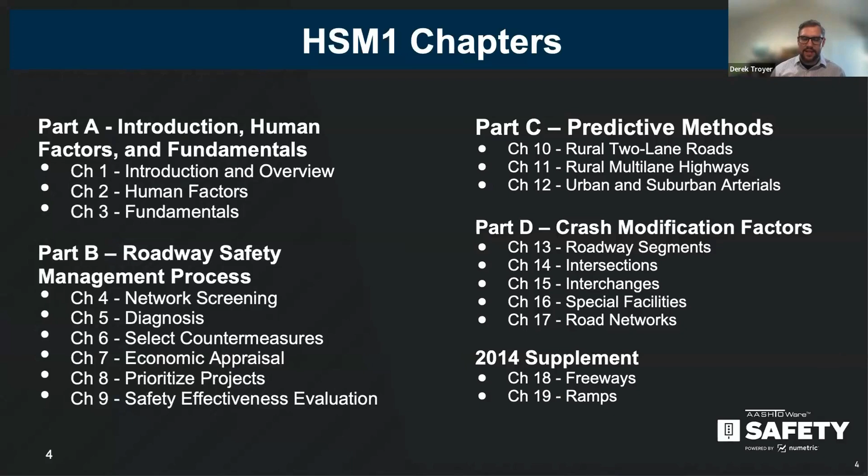So really just a quick look at what the existing chapter structure is. Overall, there's 4 parts, and then under each part, there's different chapters. Part A is human factors and the fundamentals. Part B, the roadway safety management process. Part C is the predictive models. And then D is about crash modification factors. In 2014, there was just a supplement on freeways and ramps, so don't really worry about that.

Getting started with part A, let's go in order. This really sets the stage for how the HSM can be incorporated into the planning, design, operations, and maintenance activities—kind of the holistic view of how safety management works, and gives a lot of background information.

It's probably the least referenced part of the first edition, because you read it once and think, oh yeah, I'll talk about a few things. So it might have more life as we move into the second edition.

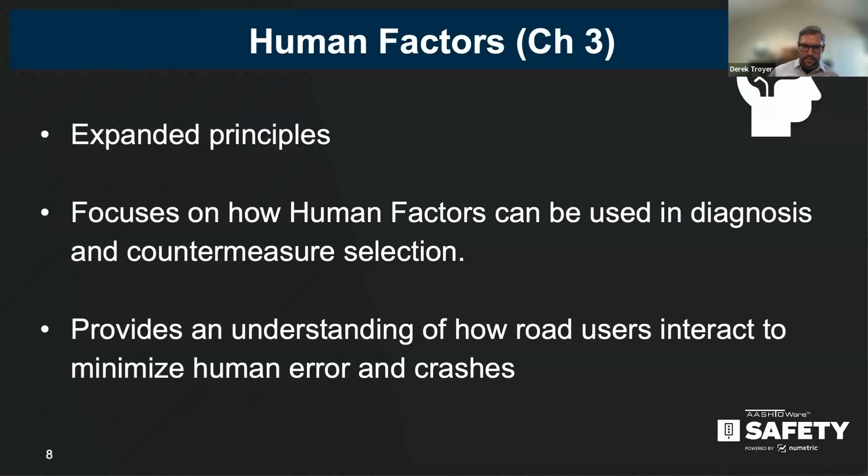Moving on. Change slides. There we go. We'll do this one.

Moving on to chapter 4. I glossed over the first two, but there were no chapters specifically related to pedestrian or bicycles before. This is the first time it's focused on understanding how you can incorporate pedestrian and bicycles into the roadway safety management process, as well as some of the predictive models, which we'll get to in Part C.

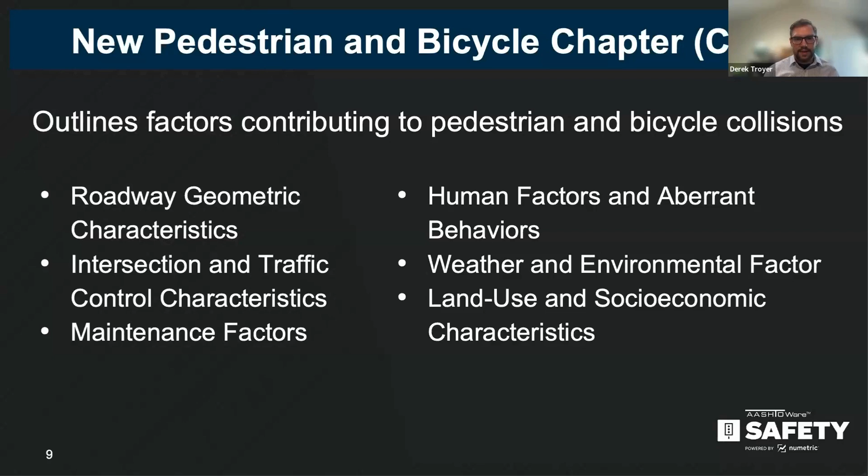Overall, it outlines the contributing factors in these different areas you see on screen. It also added crash typing for non-motorist pedestrians and bicycles, specifically on what they were doing at the time of the crash—we get tons of crash reports, which are kind of our bread and butter for figuring out what's going on.

And that's really lacking—it's just like, 'collision with a motorist,' or 'collision with a non-motorist,' like thanks for helping. So this really helps identify, if you read through the report, how to categorize the movements, and those crash types can then lead to countermeasure selection.

So if you have this kind of scenario repeated at a location, you should consider these countermeasures or treatments for inclusion. Some states, like Massachusetts, are moving forward—they have a vulnerable road user box in the crash report, which I checked yesterday, that includes some of this crash type info, like what the non-motorist was doing before the crash, during the crash, and where they ended up. That kind of information is really important.

So we'll see how that spreads. I believe that started from legislation, according to Bonnie or Michelle—somebody can correct me if I'm wrong. But I think that's one good way to see how we're making progress with these crash types overall.

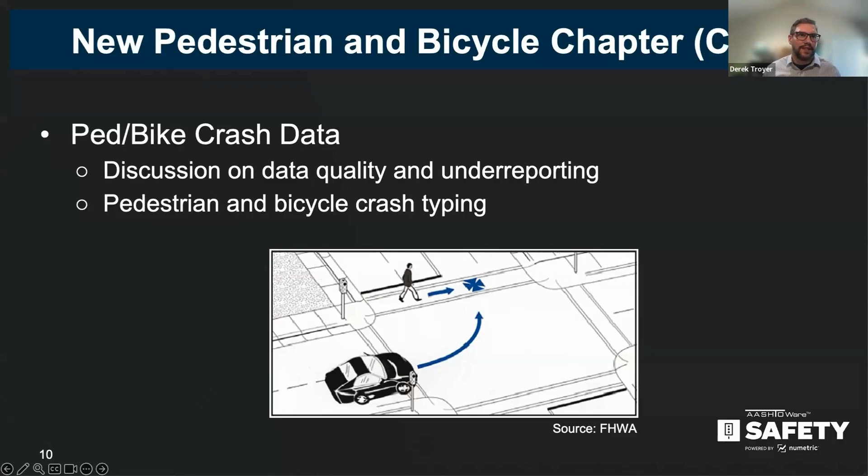So get ready, we're on our first or second poll question. I want to know, if your agency creates pedestrian crash types, how do you categorize them? Let's see here.

So that's the highlights of Part A—again, really trying to incorporate more human factors and pedestrian and bicycle considerations into roadway safety management, giving them the priority they deserve in our industry as we move forward trying to solve serious injury crash problems.

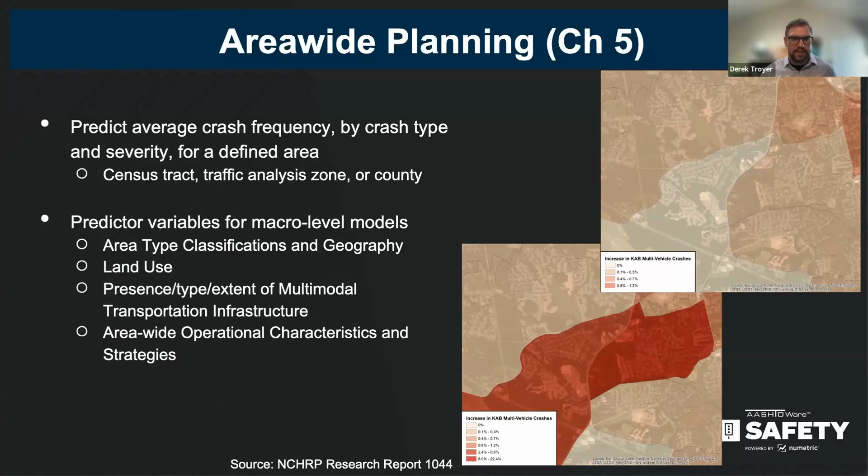I just want to touch on network screening because this is subtle and most people I think will miss it. There were 13 performance measures in the network screening chapter. In the first edition, we removed two. That was kind of consensus of the panel and AASHTO Committee on Safety steering committees. But there was also this intention of grouping these. So the first 5 are really great at reporting, but they're less reliable, so you want to, if possible, try to move towards the more reliable methods for network screening.

And so they highlight them. All the 11 remaining ones are still defined, still included, still have a nice chart in the second edition that tells you what the limitations are, what to consider if you're using that measure in your performance, depending, even if you're still using it for network screening. Like, do something is what my mantra is. I'd rather you do something and work to advance the methods versus not doing anything and waiting until you have everything accurate.

So the other thing in the network screening chapter that I'll note is there are actually safety performance functions added. So there are national network screening models available now. They're pretty easy to develop. So I don't know how beneficial it is, but it does give the chapter some weight with an example problem as well.

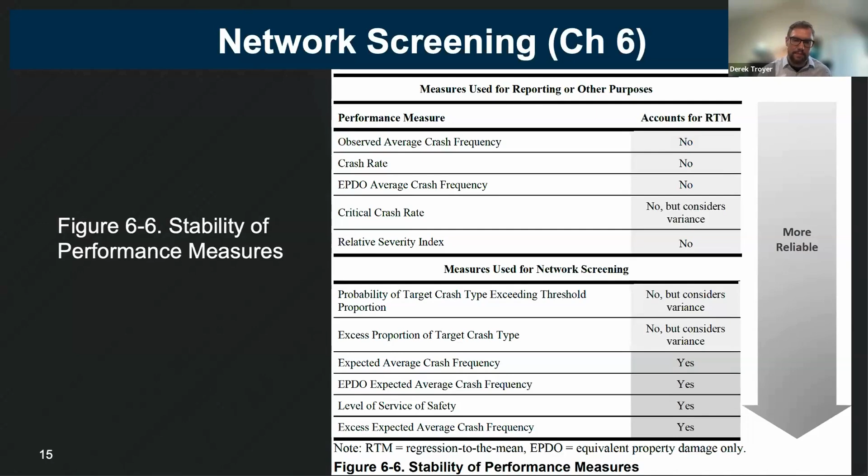Now I'm just going to touch on systemic safety management. I hope everybody knows what this is. It's near and dear to my heart. It's one of the best data analysis tools we have that is proactive when you're looking at crash data. So how this works is you identify a target crash type, usually from some state strategic highway safety plan. I've seen others in the local road safety plan area, comprehensive safety plan area.

These are like priorities for the communities. And then you go in and you find where those crashes are occurring, what the facilities look like, and you pull out contributing factors, things that are in the area. They might not contribute to the crash, but they're all these locations with severe injury crashes have these similar factors, and they might not lead to the crash, but they're there.

And then you screen your network regardless of crashes for those same contributing factors. And if you have 5 factors, you rank the ones that have all 5 to the top of the list, and you just rank down from there. So you can complicate that, you can use predictive models with this, but at its basic level, it's trying to find locations where crashes have already happened and then do countermeasures where you haven't seen a crash yet, so there's no crash history. And that's really the benefit of the systemic analysis, because we know crashes are random in nature, especially our fatal and serious injuries.

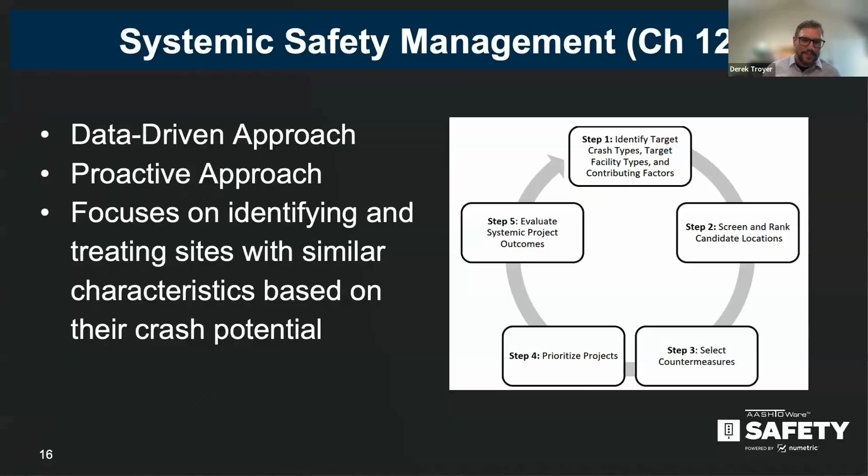So moving on to part C, I'll just go to the next slide. It's complicated.

There's at least 100 new predictive models. I think in one meeting I asked how many more safety performance functions or crash prediction models are we going to stuff into this thing, long term? How sustainable is this? And we think we're reaching critical mass. There's definitely some cleanup activities, which I'll get to in a couple slides.

But overall, the new ones that have the most attention are roundabouts, luckily. It came out of NCHRP 1770. And then one-way streets and 6 or more lanes on your urban and suburban arterials. Same study, I think it's 1762, or 1758 - one of those two includes your one-way streets and 6-lane plus.

But then it also took out all of the pedestrian and bicycle prediction models that were included either proportionally or the best we could incorporate them into the prediction models with motor vehicles, and they're now separate. So they're all pulled out and have their own prediction models and their own likelihood factors, because they're slightly different than a crash modification factor.

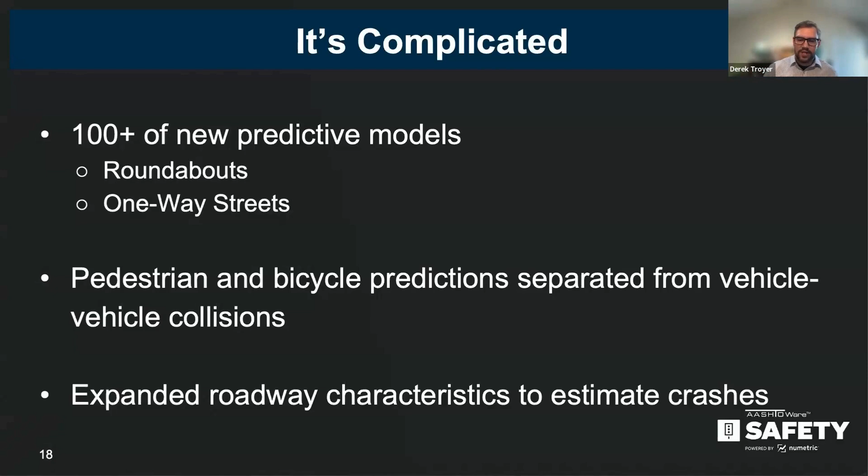And then overall expanded roadway characteristics to help us in our project development process. Safety management is, if I change X, what would my outcome be? So trying to expand what characteristics we know influence crash outcomes and severity. Just to highlight a few, I needed this slide on the last one.

These are kind of the big projects that were used as source material for the second edition of the Highway Safety Manual. So you can see them here. This will be posted so you can get them.

Now, I will caution, do not go to the research and look for the coefficients that are included in the research. They've been modified as some of these are getting old. Most of the data used for all of these studies is about 10 years old or older.

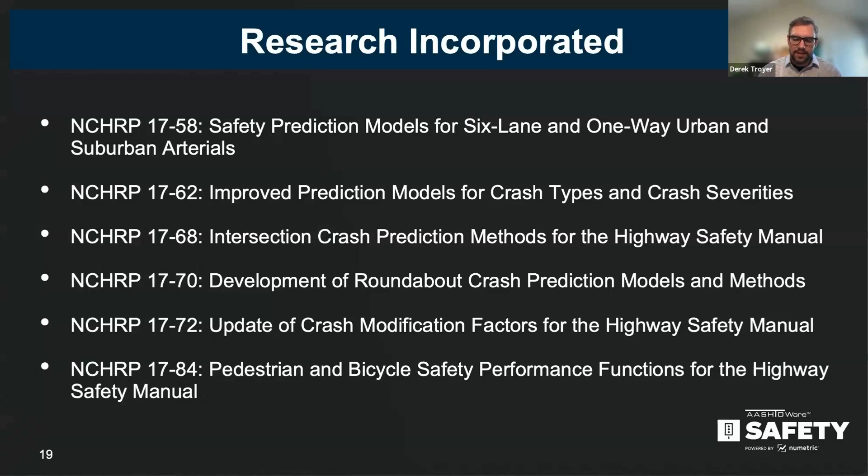So they've been calibrated, and actually 1772 did some of this work to bring them up to speed and make their site types a little bit more comparable. Maybe not the best way, but it is at least so you can compare. If you don't have your own models or calibration factor, you can use these studies.

We did exclude a few of these research studies. There were just more questions that came out of the research than we were prepared to put into the official second edition. Not that this material isn't good or has good ideas and leads to decisions - it's just maybe needs a little bit more vetting.

One thing with the part-time shoulder use or HOV, HOT lanes is we actually prepared the second edition for those. So you'll see that freeway analysis is now done directionally, where in HSM1 it was done bidirectionally. So if you had 4 lanes on one side and 5 lanes on the other, traditionally you'd analyze it both as a 4 or 8 and a 10 lane, and you average them back together to get the estimated performance. Well, now you just do one side and the other with the actual model, and you'll get your estimates. So more to come on those, and we need to dig into them a little bit more.

Overall, this is the general form of the crash prediction model. It hasn't really changed, except that pedestrians and bicycles have been pulled out into their own little prediction model areas, and they get added to the motor vehicle prediction models.

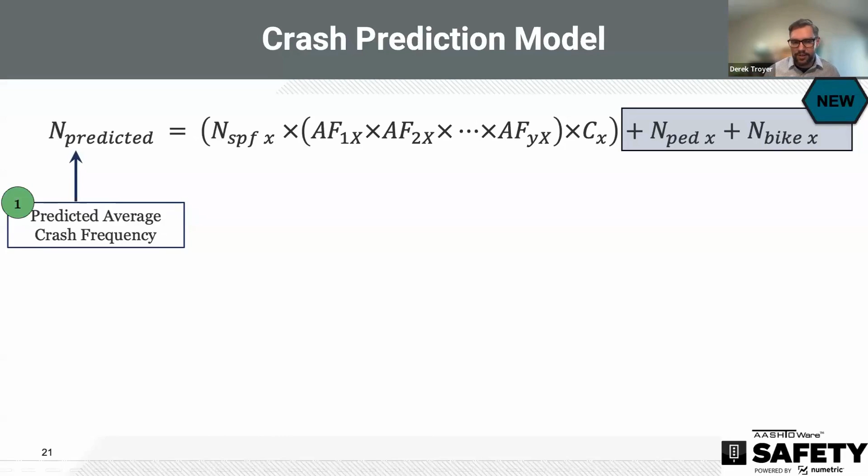I would start to at least move towards some of these easier network screening safety performance functions if possible, which is number 2. That's all you get for network screening is a safety performance function. Typically, some people complicate things, but on the norm, this is just that safety performance function, the graph of the line. It's a pure function, typically of ADT, either total, entering, major and minor road approaches, and I'll show an example in a slide of what this looks like.

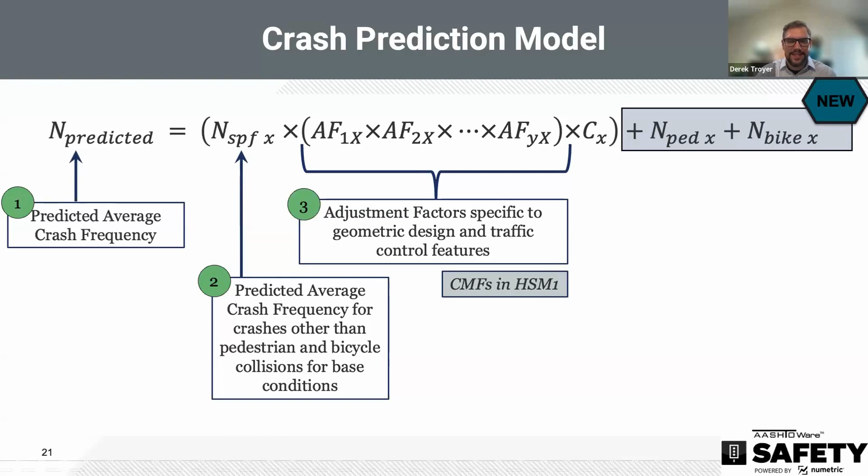Next up comes the adjustment factors, and you're like, well, this looks familiar, but these weren't called that in the first edition, and you are correct. So these are very specific crash modification factors that were developed in association with the safety performance function. Number 2 and number 3 were developed together. The thought process was, we need to call these something slightly different than a crash modification factor because they're special. And it also led to a lot of confusion as we're trying to implement some of these things. So they have been changed to adjustment factors, and they're still crash modification factors, but they're a very specific subset of them. Number 4 is your calibration factor.

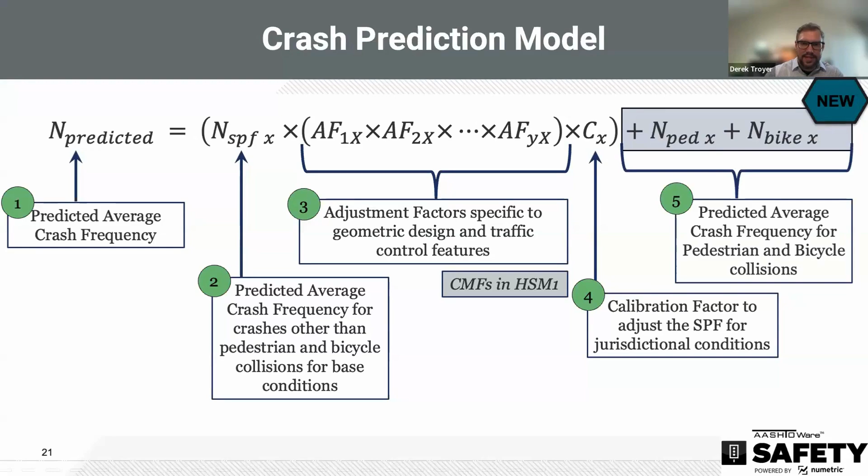And this is a lot of your changes to your local conditions, crash reporting thresholds as well. And then finally, the new pedestrian bicycle crash prediction model. So we'll dive into each one of these with a slide or two just to kind of hit home.

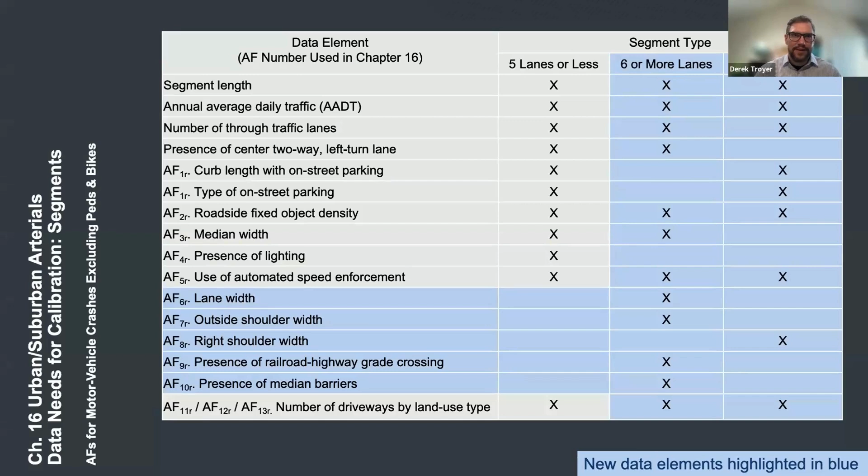This is to scare everyone, which is fine. I panicked when I started to see some of these models. So this is in chapter 16 for urban and suburban arterials. These are the requirements of the crash prediction model for segments. And you can see there's 3 groups now, and in HSM1, we only have 5 lanes or less. Now we're up to this, we have 6 or more and one-way arterials. Each one of those sets of site types or segment types require different elements to be collected and adjust that safety performance.

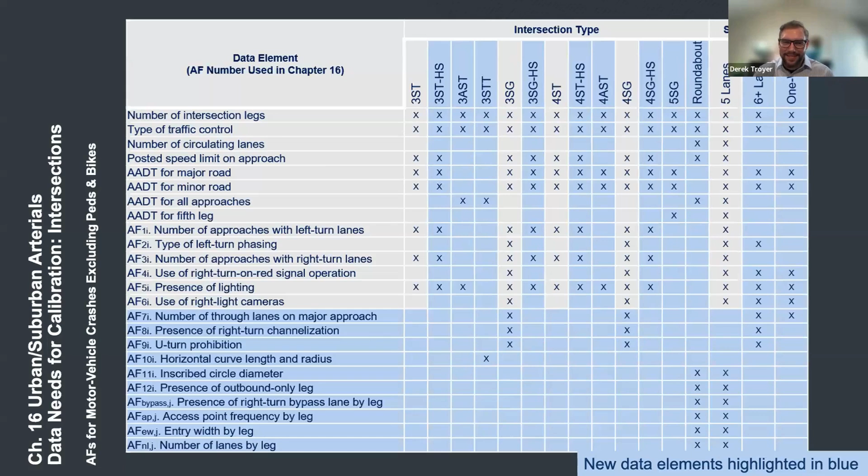And then you get the roundabouts. Finally, yay! Heads up, I believe next week... oh, I could get this wrong. Roundabout week is next week. That was this week. I was a week early, but I didn't forget. At least it's always better to be early than late. So next week is roundabout week.

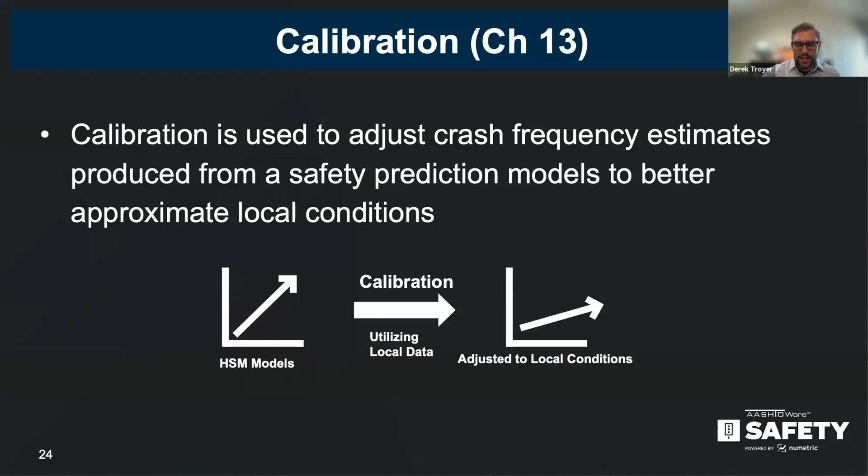All things roundabout. And then finally, the calibration factor, as I mentioned before, really trying to adjust that safety performance function and your adjustment factors up or down based on your local conditions and reporting. Why this is important is everybody has different weather patterns, everybody has different lighting. It stays warmer longer in the south, so there tends to be more pedestrian activity in the south for longer periods of the season. Just different driving populations, age. We know we're an aging population. So trying to account for a lot of these things as we encounter these safety performance functions.

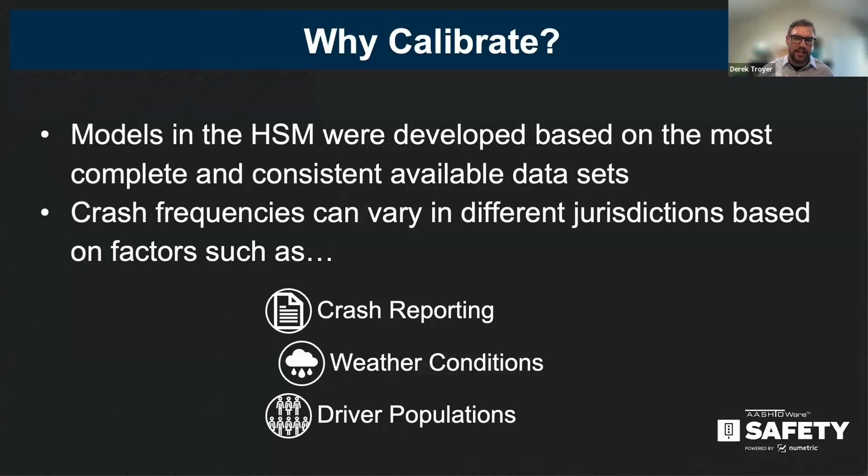Also just updating it, right? So if the crash data is already 10 years old, what were you doing in 2015? It's not here. So lots of change in the past 10 years for these models. Just in general, it'd be great to get more current information incorporated in.

So in general, can't look at questions because now I'm derailed. In general, I'm going to show two graphs. This is the first one, and I'll show another one later. They build off each other, but this is the typical, most general approach. So if everything's perfect, this is the way these work. And we know life isn't perfect, but in general, this is the intention of the models, right?

So this is urban-suburban signalized intersection. The major ADT is across the bottom. The minor road ADT is 10% of the major, and you get a safety performance function. You get a curve. Yay! See, it's still kind of linear, but it's definitely not like the crash rate—if you start out at 0 it would definitely be different as by the point you arrive at 15,000.

So typically, if you're here for safety reasons, either public concern, network screening, something got you to the site to want to investigate it further, right? So most often your observed crashes will be above that safety performance function. That's just typically where it should fall if somebody's flagged it for more investigation.

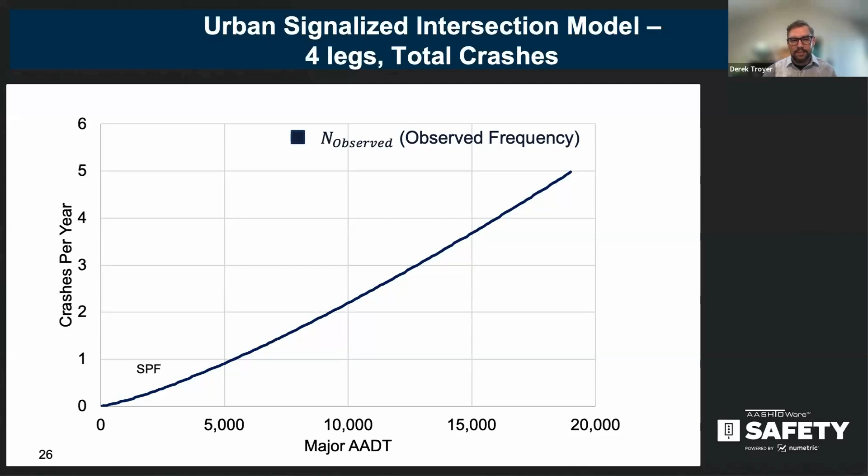So really, you just take your ADT, and this is the first step of our crash prediction model. We're going to calculate our safety performance function and say we have about 8,000 vehicles on our major road, so 800-ish on our minor road. And so we would expect, our observed is a little less than 6, and we'd expect a little over 1.5 just using our safety performance function.

Then we want to add in our adjustment factors and a calibration factor. So let's just assume all the adjustment factors combined are 1/2, and our calibration factor is 1, just so I can make the math easy. So where does this adjustment factor get applied? It gets applied to your predictive model.

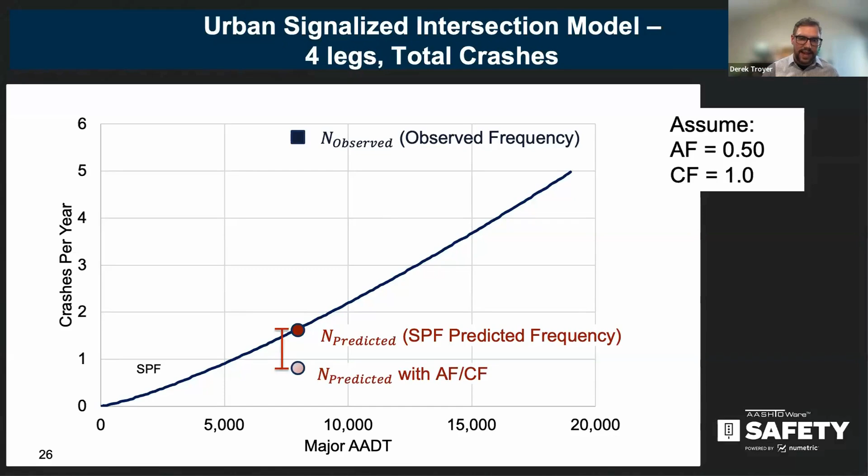And so now this is your crash prediction model results, is the second lighter red dot down at the bottom. So we'd anticipate, based on the site conditions, the long-term average, nothing else to consider at the site, the average of averages, you're a little under 1 for this location.

So Part C also includes a method to combine both the observed and the second predicted, the lower predicted amount, into what's called the expected crash frequency. And it's using the empirical Bayes process that develops an over-dispersion parameter, and it kind of weights whether the long-term average of your specific site will be closer to observed or closer to predicted.

So usually what happens is rural sites get weighted less towards the observed and more towards the predicted, and urban sites with a lot of driveways, maybe pedestrians, on-street parking, all those things lead to crashes, so there's more variability, and so that expected would typically be closer to your observed in the final outcome.

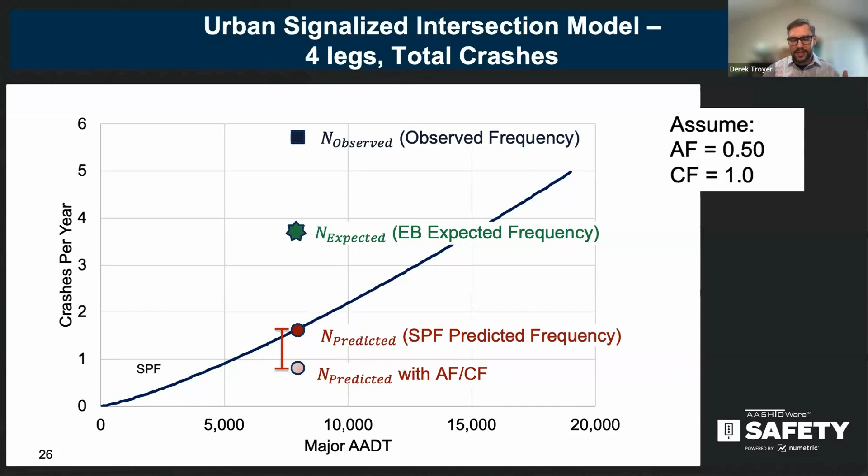So all of this is replicated for your pedestrian model and a bicycle crash prediction model. So 3 different sets of analysis to really understand the safety performance of your site.

So the one nuance: these are developed through IRAP and USRAP programs, and then calibrated and customized to the US through a research report from NCHRP 17-84. And so there's these likelihood factors, the severity factors.

So it has a lot of the similar things to the vehicle crash prediction models. The only thing it doesn't have is an over-dispersion parameter. So you really can't weight your observed crashes with these prediction models. That's the main difference between the two.

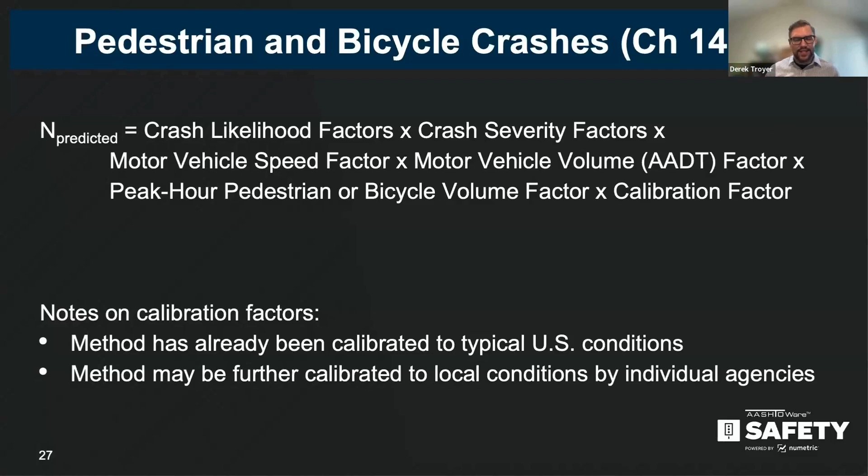Otherwise, they all have a model, they all have factors - these are called likelihood factors - that you adjust that model up or down, and then try to estimate the future performance of the site.

So the other nuanced approach with pedestrian and bicycles is you do the left side, you do the right side. Anything mid-block, whether it's marked, not marked, whatever you call people crossing the road in the middle of a segment, you do that separately, and then intersections by leg.

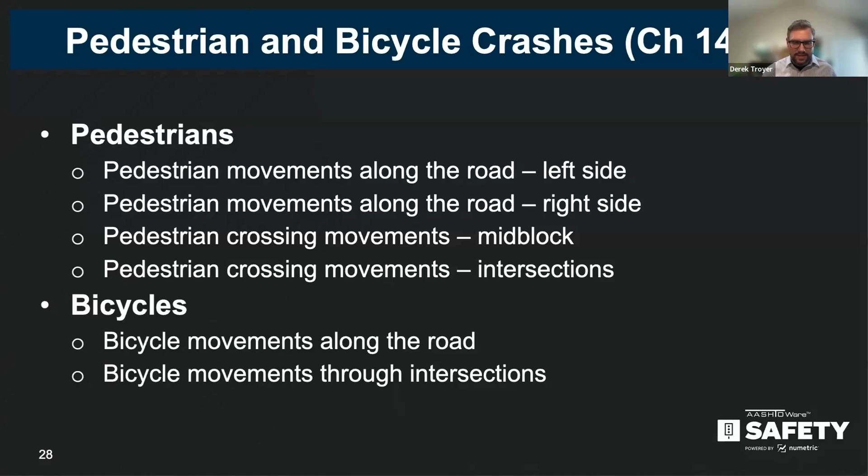So there's all these analysis approaches, and you collect your adjustment factors. A lot of them will be duplicated, so it's not a ton of extra work to do the left side, right side, but it is a step that adds a step. And then bicycles are along the road, and then movements through an intersection.

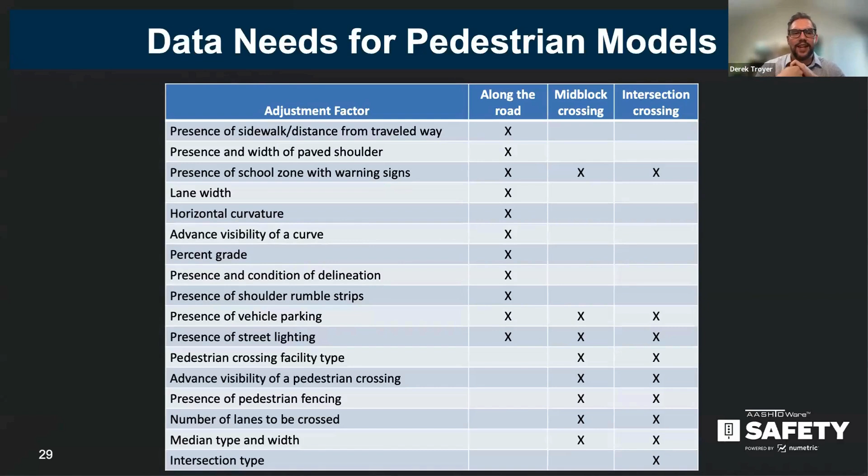So luckily, the pedestrian models and the bicycle models have similar data attributes. So here are the - I guess this title should be likelihood factor, not adjustment factor, Derek - so these are the likelihood factors for pedestrians. And then if I go one more slide, these are the likelihood factors for bicyclists.

And this is all in 1784. So if you can't wait, and I went through the slides too fast, you can go see what these requirements are over there. But a lot of, if you're going to do a pedestrian analysis, it's not that much more data to do the bicycle analysis while you're there. So that's kind of my sales pitch for it. If you're going to do one, do both, period.

We have seen some low predictions out of these, which I think calibrating them to your jurisdictions will help greatly improve the performance of a lot of these as well.

So each of these, what's my next slide? Each of these are incorporated into chapter 14, 15, and 16, which are rural two-lane, two-way roads; 15 is rural multi-lane, and 16 is the urban and suburban arterial. So these models are included in those and are only for specific intersection types, but I think they apply to pretty much all of the segment types that exist in there.

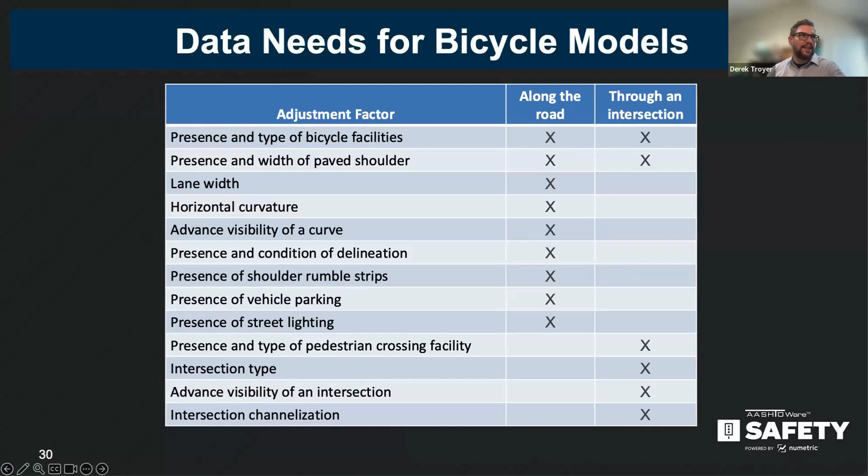So I'm going to take a breather and find my polls. So I think it's this one.

All right, so what elements are included in a crash prediction model to estimate vehicle-vehicle crashes? Craig, are there any questions I need to answer right away? Yeah, there's a couple questions that are going to be pretty quick to answer.

One question was, how do we differentiate Part C methods in the published HSM2 from the originally published NCHRP reports? Mainly the factors will be adjusted to make the models comparable. A lot of these models had their own individual research study and own data behind them, and 1772 and 1771A made them comparable. So those coefficients in the original studies will be different in the second edition, but the functional forms—I'm 95% sure all the functional forms will still be the same. It's really just the number value that's been calibrated to become nationally comparable across site types and locations.

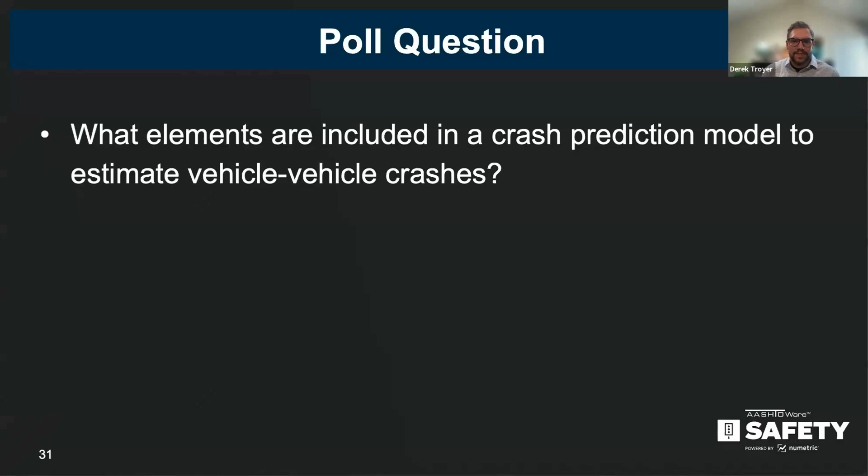Cool. All right, a few more slides. Part D—quick, we threw a bomb at it. It became dated real quick, let's just be honest. The panel and experts in the field wanted to move towards making it last longer.

We've removed all of the listing of crash modification factors, which I should define. A crash modification factor estimates a safety countermeasure's ability to reduce crashes or crash severity. It used to be a crash reduction factor—you can see the relationship: 1 minus a crash reduction factor is your crash modification factor. That just made the math easier but complicated everyone else's life. I love research.

So the listing of the CMFs in the Highway Safety Manual has been removed. That also cleans up the confusion between what an adjustment factor is and what a crash modification factor is, with the move towards these new chapters developed under 1763. I say research projects like they're my kids—I have all these numbers in my head and sometimes I get them 1 or 2 off, but they're generally in the right space. I think 1763 is the research project for selecting and applying crash modification factors, and that's really the source material for chapters 19 and 20.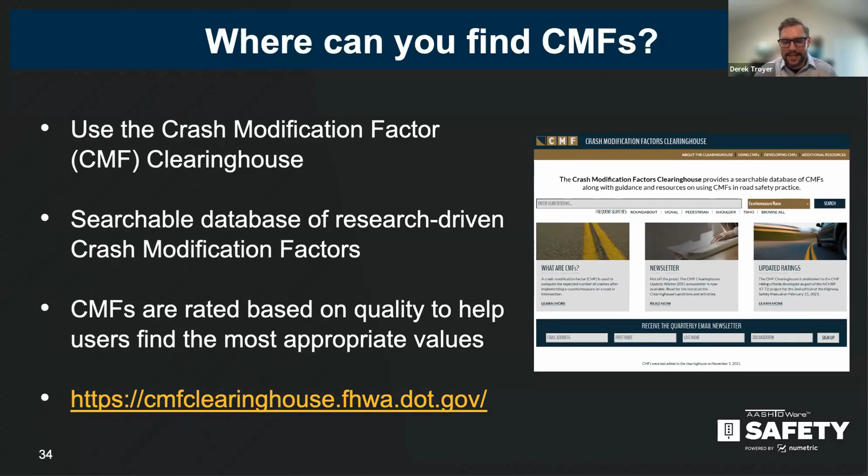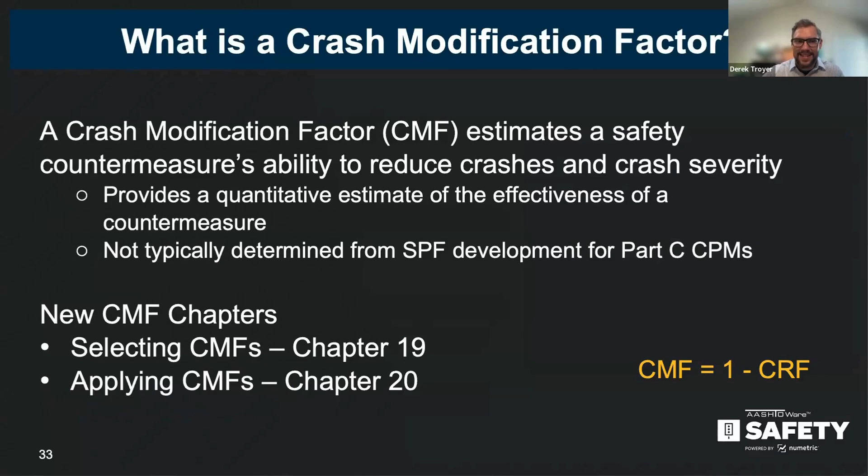I remember the Ohio example—I think it was a study done in Florida on seniors at nighttime and lighting conditions. The value looks amazing, but it really wasn't applicable to a university area and probably shouldn't be transferred to different site types. So understanding the research study and its parameters is key to selecting a good crash modification factor, which is why selecting CMFs is chapter 19, and applying them with different methods of application is chapter 20.

So real quickly, I'm going to add to our complicated safety performance function and crash prediction model. Remember, this is the purest view of if everything is ideal, this should work. So we have our observed crashes, right? And we're in the CMF world, right? We've already done all of our predictions and all those things, but we have a crash modification factor of 0.5 now.

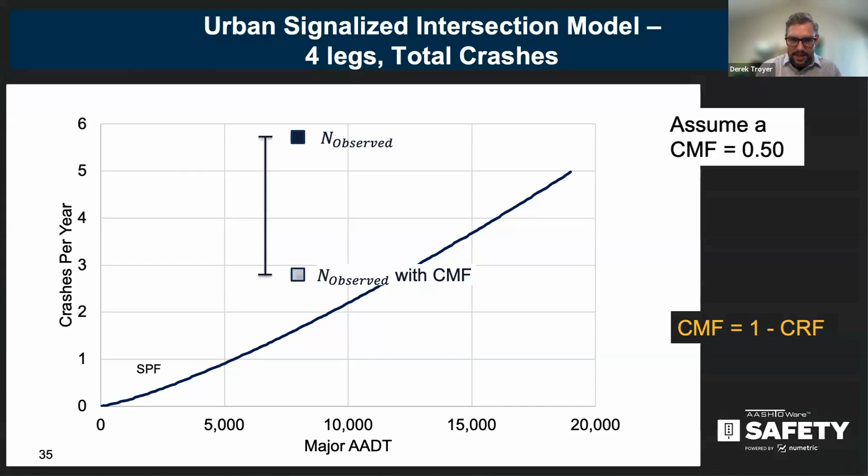So if we take that 0.5 crash modification factor and apply it to our observed, we're going to see almost a 3 crash reduction per year at this intersection, right? Now, conversely, if we look at what we predicted, the averages of averages, right?

We've even reduced that from our safety performance function down to a predicted value with our adjustment factors and our calibration factor. Now we're going to take half of that. So now it's the pink - like I was running out of colors. So it's this little, like, less than a half amount of crashes per year that you'd be reducing.

And sometimes this is the value recommended to be used in the second edition, depending if you're changing site types, what's going on between your different alternatives. So just be aware that between the observed and the predicted, this is what your safety benefits and safety performance outcomes are based off of.

Now, the ideal situation, if possible, is to use that expected value. So somewhere in between, right? And it has that over dispersion parameter, and you're weighting it between your observed and that predicted with adjustment factors. So somewhere in the middle, about 2 maybe would be your safety or your crash reduction, leading to some safety benefits in between 3 and 0.5, right? So that's a more realistic view of the long-term outcomes of what this countermeasure could do at this location.

So that's really where CMFs come into play. They can be applied to all 3 of these in different situations and different scenarios. Ideally, it's expected, and I'll get to a reliability chart here in a minute.

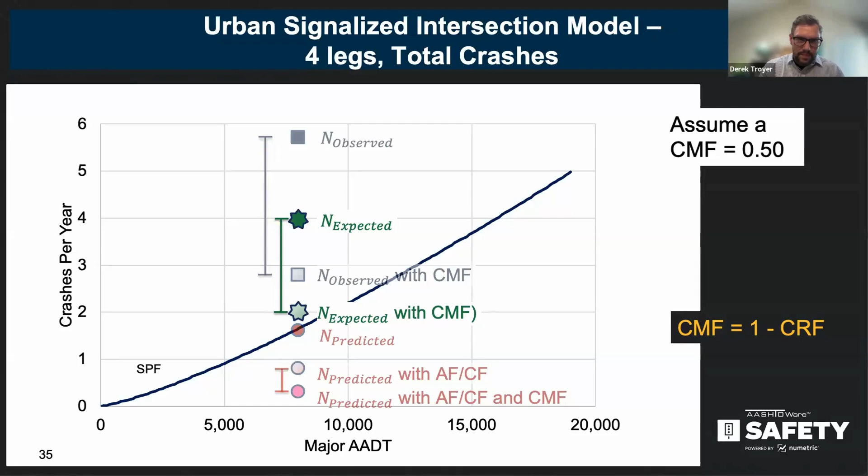So really just want to touch on how AASHTOWare Safety is preparing, really in support of our partners and users of both the tools and the Highway Safety Manual, which is coming out hopefully next year, early next year. I have been winning a bet for like 7 years, so it better be next year or somebody's going to be unhappy.

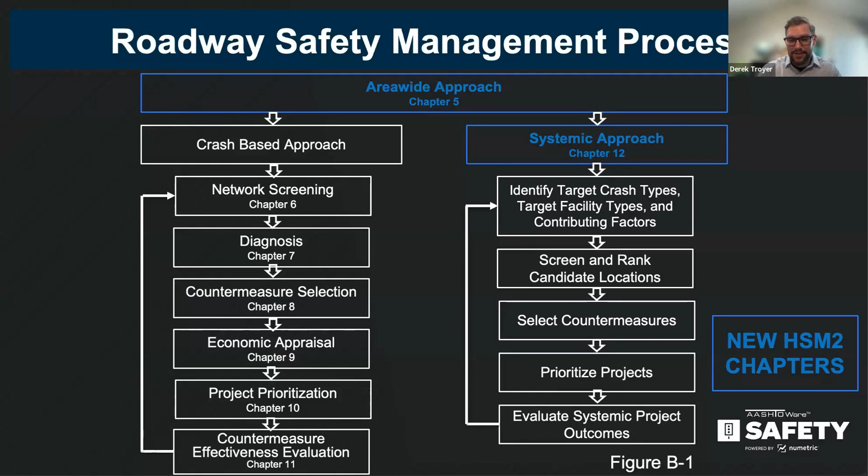So really the tools that have been put in place for AASHTOWare are supporting the safety management process. So I wanted to highlight this - really trying to actually do the left column, it's typically a crash-based method. If anybody is interested in trying to figure out how to use this with a systemic approach, I am very passionate about it and would love to dig into it a little bit more and get your thoughts.

But really starting out with network screening, right? So we're making sure the application supports those advanced methods, the more reliable methods for network screening. So this, you can come in, you can do screens on intersections, segments, a sliding window at different lengths, and their sliding window length is 1/10 of a mile, and try to prioritize your road network, right? The bread and butter, this is network screening. We're going to figure out where our biggest priorities are, so then we can start doing some better site assessments.

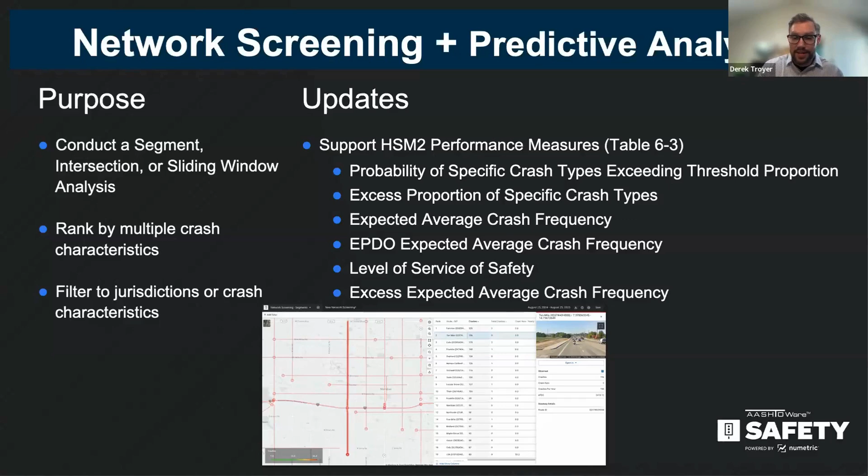And what you use next to do a site assessment is Crash Query. So this tool is, I like to say, choose your own adventure. I might be stealing that from Greg, but it is kind of the first level diagnosis tool inside AASHTOWare Safety. It isn't curated at all, it's really a free-for-all. So you can highlight different crashes, different years, change your corridors based off hopefully your network screening, but even like customer inquiries, the public inquiries, right?

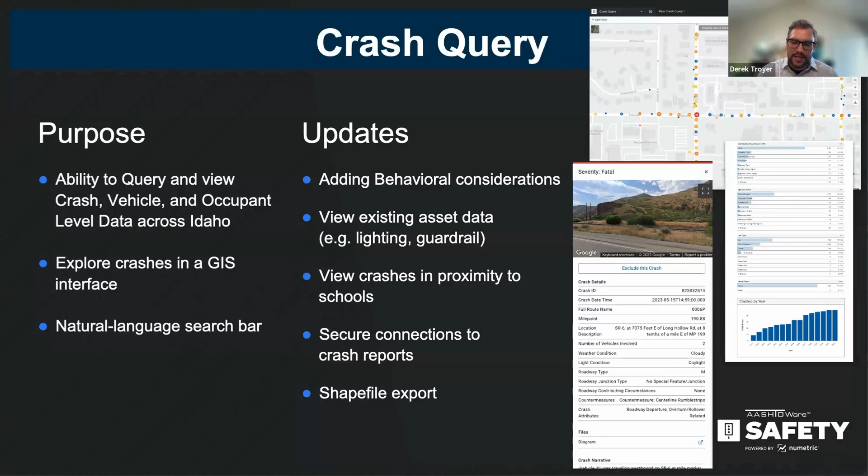We've all been there, but we've been trying to add more and more asset data and other tools. Like Idaho has schools added in, so you can kind of see these other features in the area of this crash data to really start diagnosing what's leading to the crashes at our site.

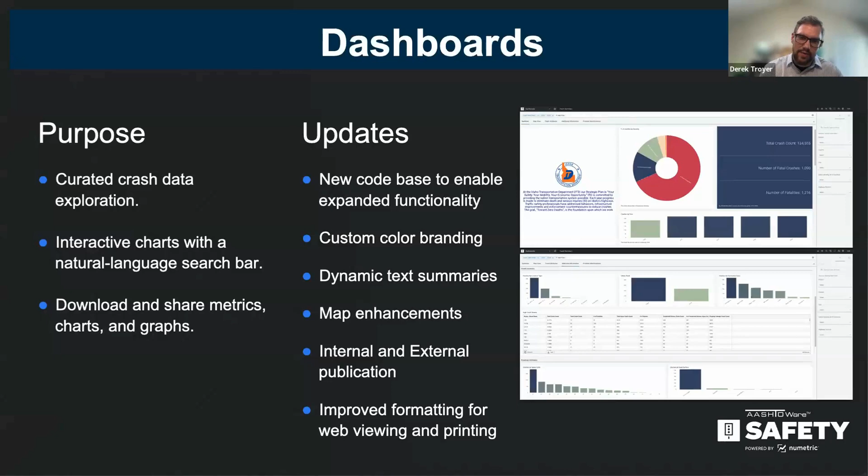Dashboards maybe is a little muddier in its connection, but I just want to highlight there's been lots of updates to it to add flexibility, standards, a little 508 compliancy, all those things have been added to it. So these can be internal where you have to have that login, or be externally facing where nobody needs a login, everybody can have access to it, but it is really that curated journey through your site analysis.

And then two tools that really do some of Part C and Part D of the Highway Safety Manual. Safety analysis really looks at crash modification factors, and it's been around the longest. It has definitely been the more curated environment for our users, where you go in, it tells you your crash patterns, it recommends crash modification factors for you based on those crash patterns. On the crash patterns, you can select sub areas, so I want to look at these intersections and figure out what's going on and which countermeasures maybe are most applicable to that intersection.

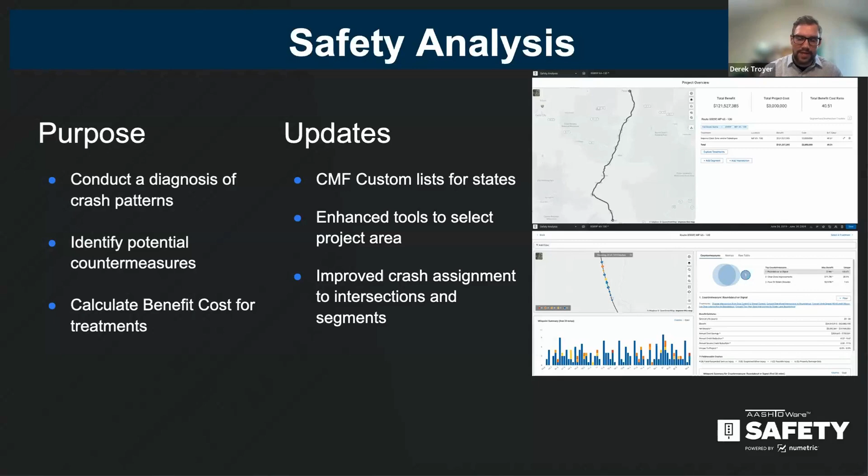And then the other tool, which is more recently developed, is the alternative design tool. And this is really the staunch Part C analysis tool. So it has all these prediction models in it. It has all those crazy adjustment factor charts and graphs, like which ones do you need to fill out when? That is all being built into this tool called alternative design.

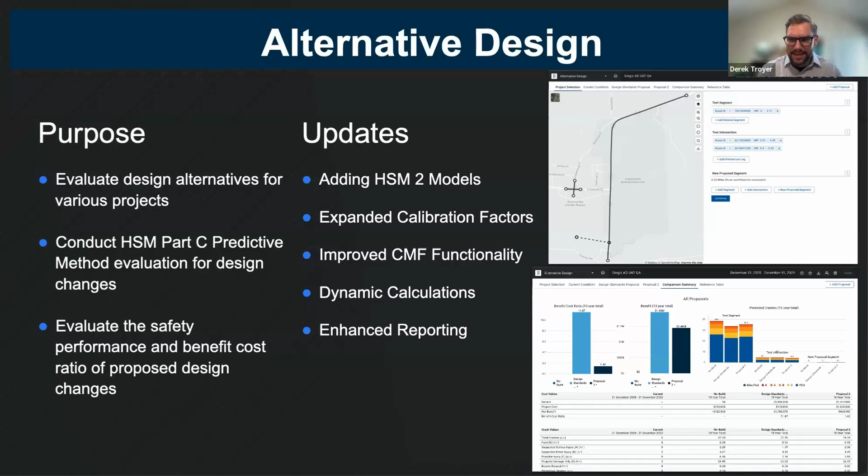There are lots, this is constantly being updated. Hopefully it sounds like - wait, what month are we in? November, not next month, November. The HSM 2 models will start to be released in the application, so you can start to see how things vary, and then try to determine which calibration factors, or start calibrating the new models, all those things, to make sure that results make sense and are applicable to your site and your state, right?

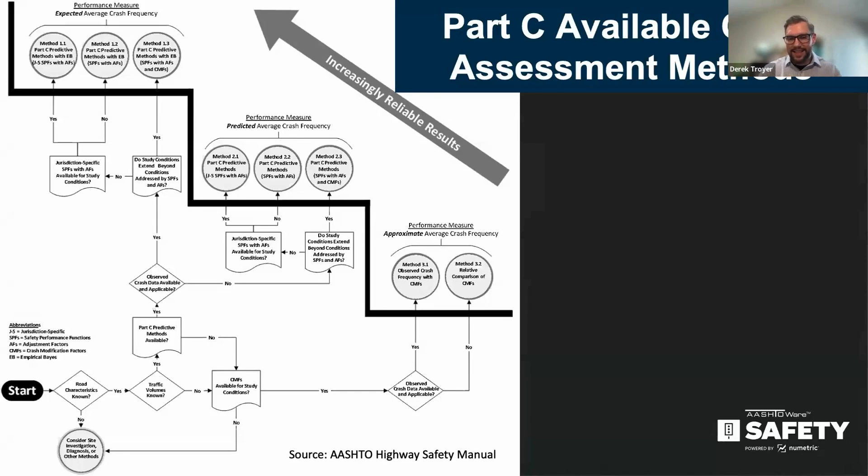Don't spend more on the analysis than the project itself, just make a decision. So if you have a really low cost project, maybe just use observed crash data with a crash modification factor. And then you have your crash prediction models with safety performance functions. So kind of the top one was blue, the good - observed crash data was blue in my charts. The better is the red, and the green is the best, right? And that's kind of how I've described them through those chart examples.

So really to differentiate the last two tools, alternative design are the better and best models. Safety analysis only does the good. And then we're working to incorporate also that observed crash data with CMFs into alternative design, because you're always going to encounter, unfortunately, sites that do not have a crash prediction model. And so we just want to make sure that one tool can actually analyze your entire project and get you reliable results that you can then justify an investment of different countermeasures, right?

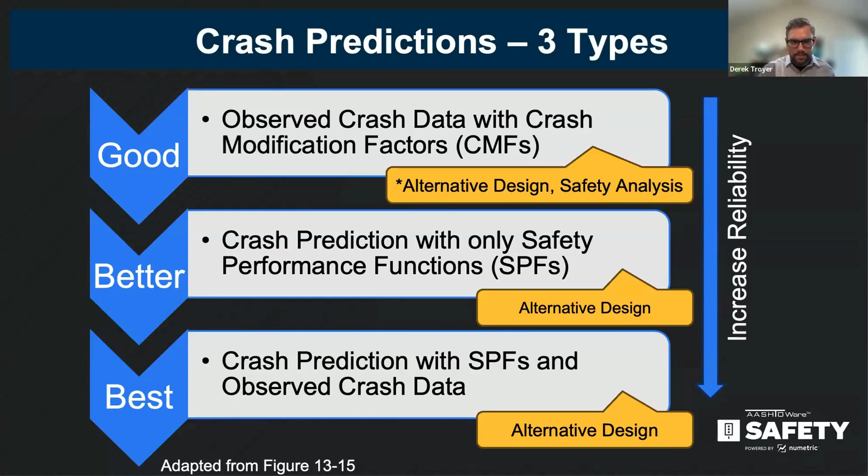So moving forward, we're really trying to still support our partners. That's our number one mission and goal, and saving lives in our roadway network, right? So continue to develop the tools to support the roadway safety management process. We are kind of going down this new road of methodology with the tools. We're starting to notice that it's not just, hey, here's a tool. It's, hey, what does this thing in this tool mean? Right. So trying to add training modules that can help users better understand what they're inputting in these applications, rather than just reading 1,600 pages in the highway safety manual.

And then supporting states in calibration and safety performance function development. Again, these, even though they haven't been released, they're getting kind of stale in models. And so making sure that they're updated, at least with a calibration factor, will be important. And then as Greg showed, there's 21 states that are partnering with us. So we have a huge consortium of data, and I think this can start to be used to advance the science of safety across the nation or regionally, right? So can 2 or 3 states get together and do a research study together on maybe even calibration or safety performance functions, right? Just to put on my research hat, 4 things that I think you should keep an eye out if you're new or rarely use this.

There is a practitioner's guide, what I call the 1727 project. There are more crash prediction models coming out in 126, and then 130 is the official NCHRP training program for the second edition. 135 is kind of cool, the imagery reference illustrating the crash elements or data elements in a crash prediction model. So all the adjustment factors should be defined so you can actually understand how I measure it, what do I do with it, that kind of thing.